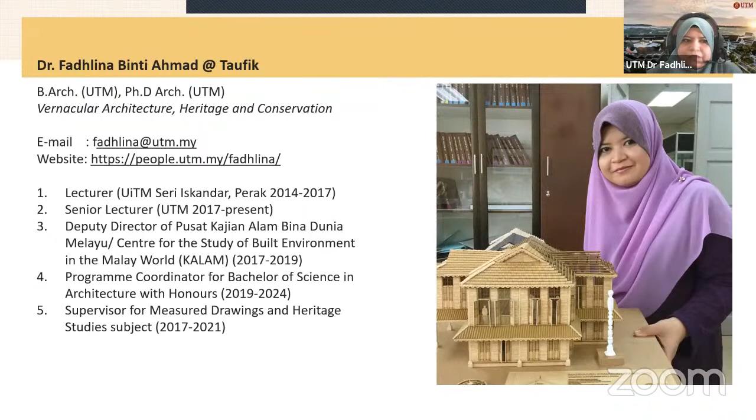I have been supervising measured drawing in UTM since 2017 until now, but unfortunately for these 2 years we cannot get permission to go to the site, so we changed the measured drawing into the monograph publication instead of going to site. So what I'm going to share here is more on how to do the data gathering on site and how to do the report writing, but it will be only a brief and general overview.

Okay, so first thing first, I think you are going to do your measured drawing this semester, right? Or this week, is it, Madam Farhana? The students are going to the site. Yeah, actually one of the groups is already at site today, they're not joining the talk, they will watch the YouTube later. Okay, so it depends on the group. Right, so basically this one is more on the things that you are going to do on your site later.

Okay, why do we need to learn about the history? I'll start with the introduction first. To understand the present and anticipate the future, one must know enough of the past, enough to have a sense of history of people. Also, a quote by Robert Penn Warren: history cannot give us a program for the future, but it can give a fuller understanding of ourselves and our common humanity so that we can better face the future.

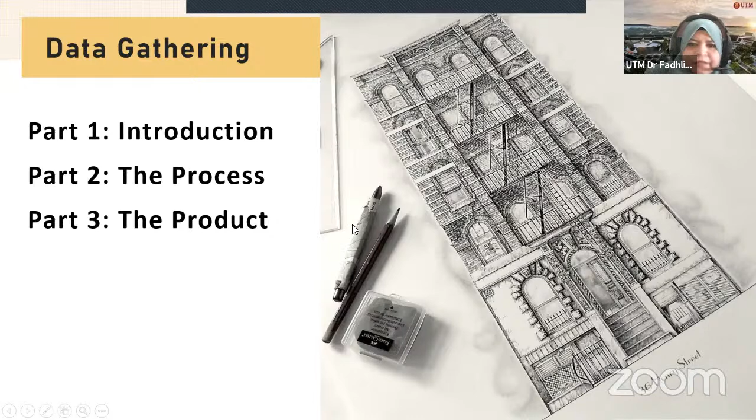Okay, what is measured drawing? This is another question for the students. Can I pick names? Okay, so next is Rafika. Okay, what do you know about measured drawing?

You are going to do the measured drawing this week, right? So perhaps by today you are already familiar with this term. Rafika, you there? I should take students' attendance now. Hi, Rafika. Hello, madam. Huh, yes, what is

Hello? Are you talking to us? Yeah, Dr. Fadhlina. Okay, Muhammad. Oh, Muhammad, hi. Thank you for joining us today. I'm not feeling well, that's why I'm not chasing all my work. It's okay, my pleasure to share the experience with you guys. So I will be joining you today, just keep me up, I just listen to what you say. It's okay, nice to meet you Muhammad. Thank you. Okay.

So Rafika, are you there? Hello? Right, okay, yes yes. Are you talking? Can you hear me clearly? Tak dengar lah Rafika, mic you tak bergerak pun tu. Oh sorry, sekejap. Apalah, I think mic problem kot. Okay apa tadi, okay. Zainab, hi Zainab.

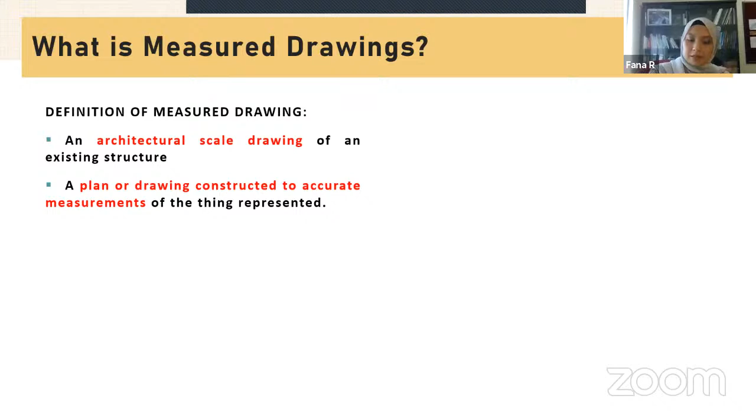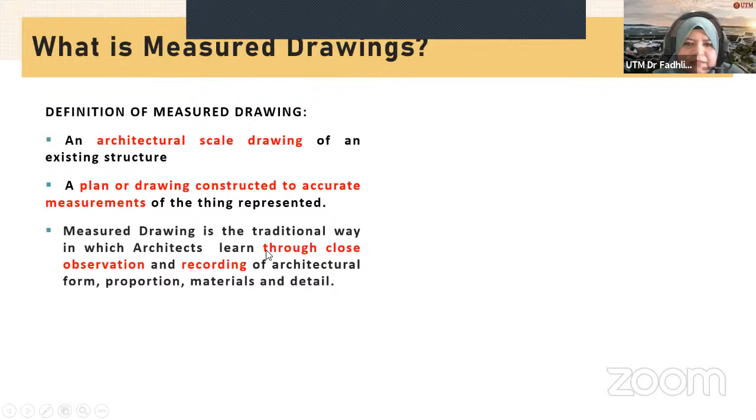Right, definition of measured drawing: an architectural scale drawing of an existing structure, meaning the structure is already there, and then you go there and measure it and put it into your documentation. It can be a plan or drawing constructed to accurate measurement of the things represented, like you said. It is a traditional way in which architects learn through close observation and recording of architectural form, proportion, materials, and details. So those are the things you need to know about measuring drawings of buildings after this.

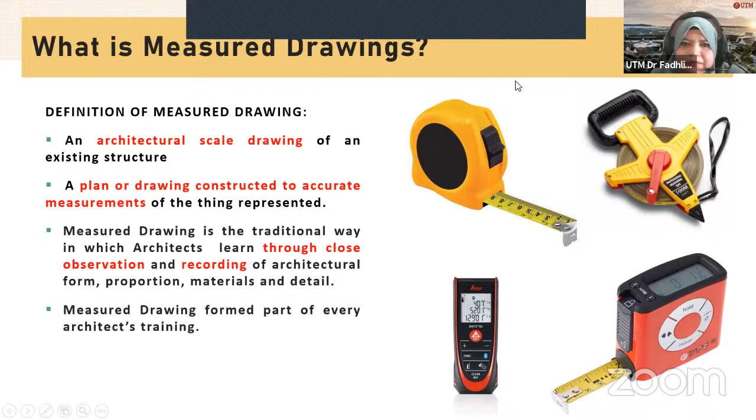You need to record all these findings in terms of architectural form, proportion, materials, and details, and so on, and it goes beyond just this one. Okay, these are the traditional equipment used for measured drawing nowadays. Because nowadays we also have technology, something like GIS and so on, but this one we usually use for students to learn in more detail and in an easier way.

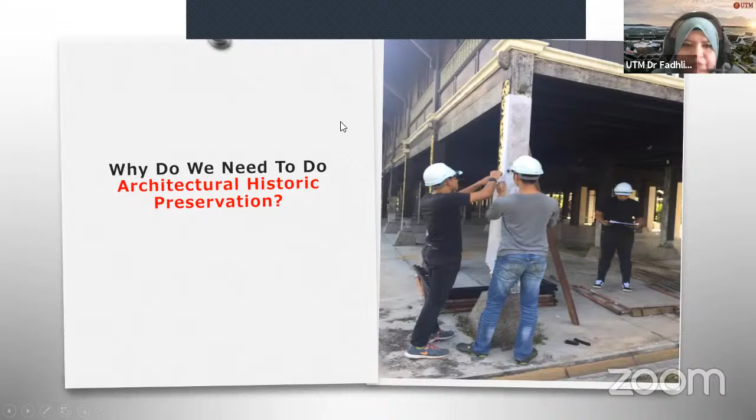Why do we need to do architectural historic preservation? The first one is for education purposes, for the 3D learning experience. For instance, you have this kind of historical building that nobody has documented before, and then you go there and do all this kind of measurement, something like this one. They are trying to rub the pattern so that they can document this pattern into a 3D model. This one is also like your studio project, but in your studio project you design your own building and then do the 3D model, whereas this one is basically based on whatever already exists.

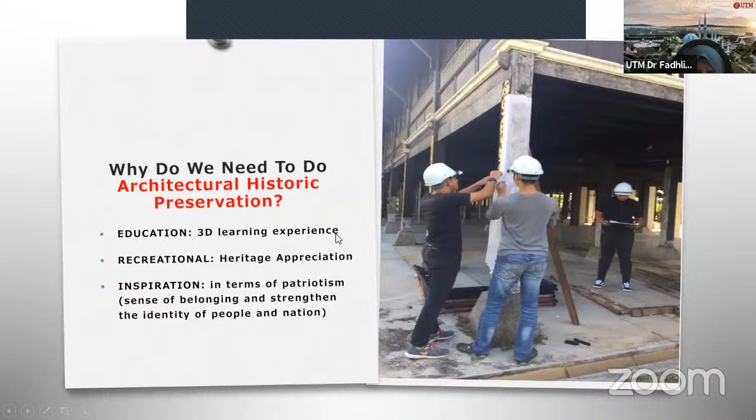And then for the recreational purpose, it is more about heritage appreciation. Like I said before, why do we need to learn about heritage and traditional things, so that we can appreciate them more. Then there's inspiration in terms of patriotism, sense of belonging, and strengthening the identity of people and nation. Not only from Malaysia - some of you are coming from different countries, right? So you also have your own identity based on your own origin, and you need to know the identity of your particular space and nation.

Measured drawing is always related to values, including several values included in measured drawing. For instance, we have architectural values that we want to instill in you students. Architectural values, heritage values, you need to know about cultural values, social values, aesthetic values, historical values, and the values of sense of place. So we are not only focusing on architectural values, but you need to know all of these things in general, all right?

Okay, issues that are commonly faced by historical buildings. That's why we need to do all this measured drawing and so on.

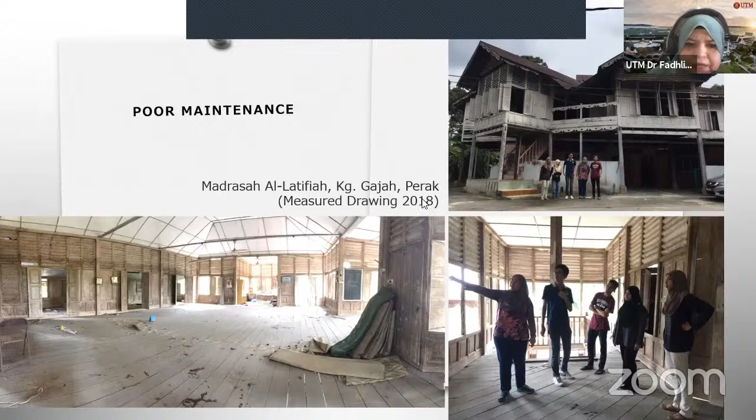This one is a madrasah. They use it as a learning center to recite Al-Quran, and they usually invite religious preachers to come and stay here so that villagers can come and learn about the Islamic religion and so on.

This is the condition during 2018, on the upper part of this building. But until now, they are still using the lower part as a kindergarten. I just want to show how things will ruin everything if there is poor maintenance, because of conflicts in terms of financial constraints and so on.

And some of the buildings have been demolished because they wanted to do... sorry, can you hear the sound?

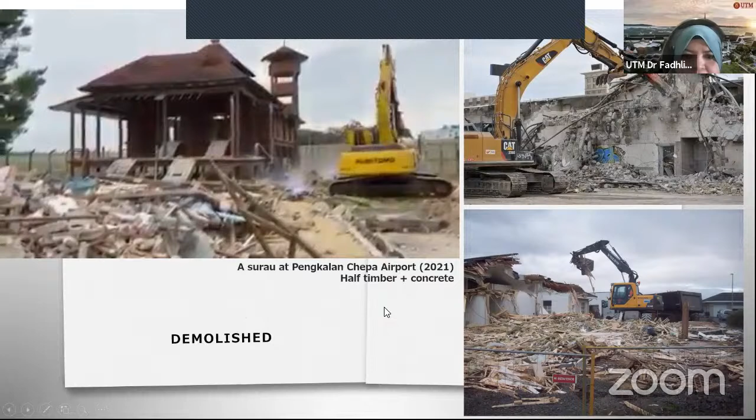Okay, this is an example of a surau at Pengkalan Chepa Airport. I think Madam Farhana knows about this building because it has been used for years. But in 2021, a few months ago, it was demolished because they wanted to make the land bigger for Pengkalan Chepa Airport. Some of the nearby residents did not agree with this demolition because it has been one of their childhood memories, using this surau for daily prayers.

So that's how things became very unfortunate. We could not save the heritage building. But there is something contradicting in how they handled it. For instance, half of the timber had been disassembled, and the tractor was only used to demolish the concrete part of the surau.

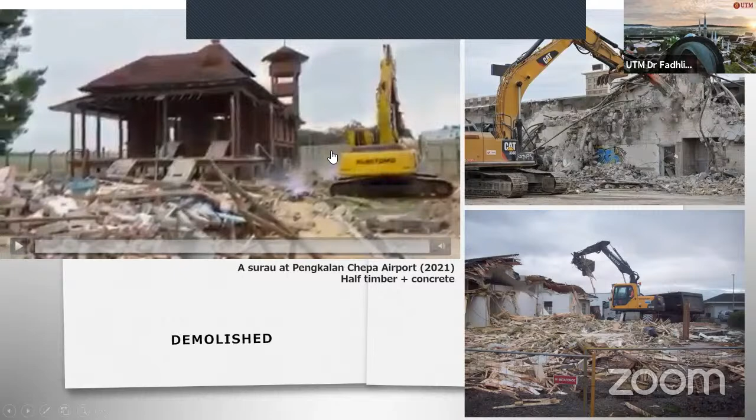Alright, so that was only the introduction. Why do we need to do measured drawing? It's so that before heritage buildings and traditional buildings vanish, we have already done the documentation.

This one is more on the process. As I said, I will share about my experience in UTM, because I have been involved in UTM's measured drawing program since 2017. We currently have more than 600 buildings documented, saved in Kalam, Pusat Kajian Alam Bina Dunia Melayu. All the documents and compilations of the measured drawings are saved there, comprising mosques, shop houses, temples, churches, schools, government quarters, administration offices, palaces, and so on.

We have also done measured drawing throughout Malaysia, and we managed to do it in South Thailand, North Sulawesi, South Sulawesi, and Cambodia.

In UTM, we have two separate subjects for measured drawing: one covering the drawings and posters, and another called Heritage Studies, comprising 3 credits, which involves report writing. We teach this subject during the short semester, so students do not have any other subject except measured drawing and heritage studies, allowing them to focus more on it.

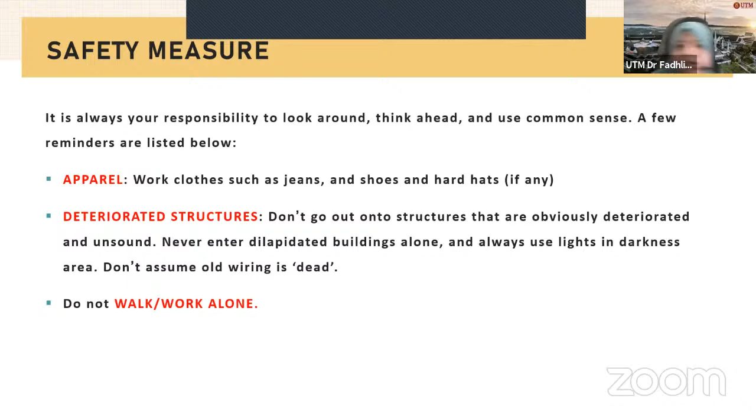And on site, these are the steps, perhaps tips and tricks you can use in doing your measured drawing later, for your first-hand experience. Get to know your building first before you start measuring. You need to know the location, surrounding context, current condition, and so on. For instance, where is the location of the building? For the first one, it's a Kelantan traditional Chinese house located near the beach, and what design strategies did they use to make sure it's suitable to be next to the beach. Before you go to site, you can also try to find this information online.

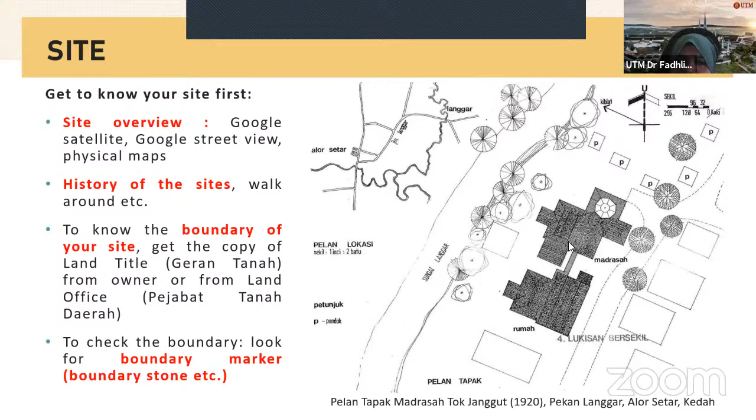Right, so these are usually what we require you to know - the history of the site, and the geography of the site. Geography means you need to know the type of topography of the particular site - for instance, is it located on a hill, or next to a river, or next to a beach?

And then the socio-economy - what do they do in their daily life? What are the main resources for them? Are they fishing? Are they doing rice cultivation? Are they rubber tappers? You need to know the common trait of all the people living nearby, and also the culture of that particular community, and their settlement.

For the measured drawing, you are very dependent on primary and secondary sources. For primary sources, you get it from field studies based on interviews with the house owners, neighbors, relatives, headman, historian, craftsman, woodcarvers, tukang, local authority, and so on. Make sure when you do your measured drawing later, you interview all these related people to know more about your building. If not, you will lack data if you don't do this interview session.

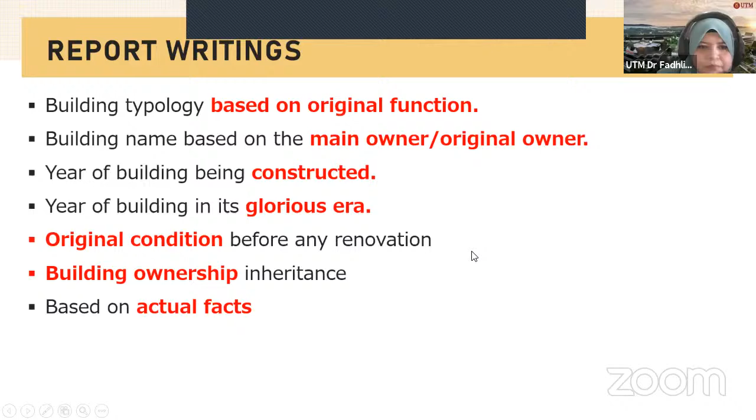And we need to know the original condition before any renovation, and also the building ownership inheritance. We usually do a family tree of the owners, for instance who is the grandfather and who is the great grandfather. Perhaps we can get it from the newer generation of this house, and it needs to be based on actual fact.

There will be some challenges for abandoned buildings. I'm not sure whether you are going to do an abandoned building or a newer building. Before this, we also worked on abandoned buildings—some had a change of name or function, like I said before, and some were in dreadful, very bad condition. Sometimes we cannot even step into the building, so we need to find relatives for information. This is quite hard because the relatives have usually already migrated to urban areas, so some information cannot be obtained directly from the surroundings.

There is also conflict of facts. For instance, somebody tells you the house was constructed in 1920, but somebody else says it was built in 1930—so there is a conflict of facts. But your responsibility is only reporting. You need to state in your report that the headman of the village said the house was constructed in 1920, however the relatives say it was built in 1930. You need to report both; you cannot assume one is right, but you need to report both and mention who said what.

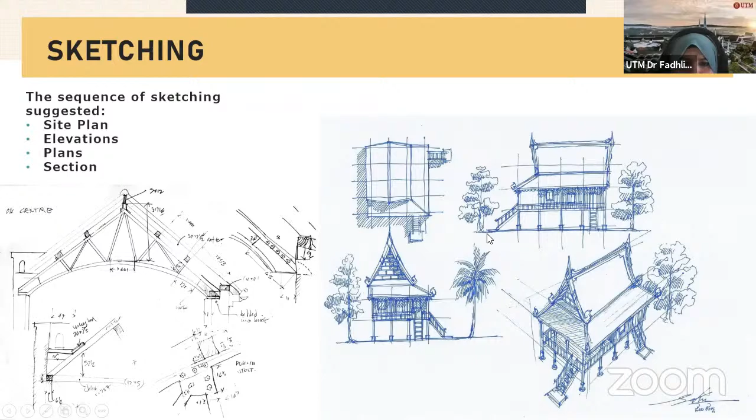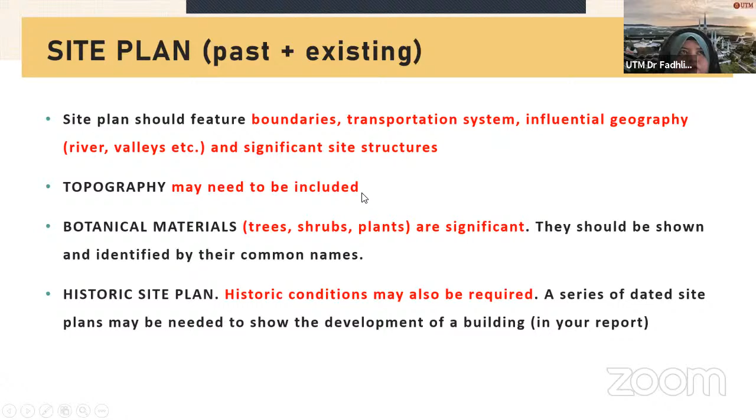This is the first thing when you reach your site later - you need to sketch. And I think this has been mentioned before: you need to know your boundaries, topography, whether there are trees, shrubs, plants. And if the site is located in a historical area, you need to know the development of the building and so on, perhaps the morphology of the buildings surrounding this site.

This is another example of how to do the floor plan. We usually start with the outline first, working outside the building, then add openings like windows, doors, external, etc. Then we start on the inside of the building, beginning with rooms, etc. You need to show the thickness of the wall because you're doing measured drawing. Everything must be measured - we need to know the accurate measurement or dimension for each space.

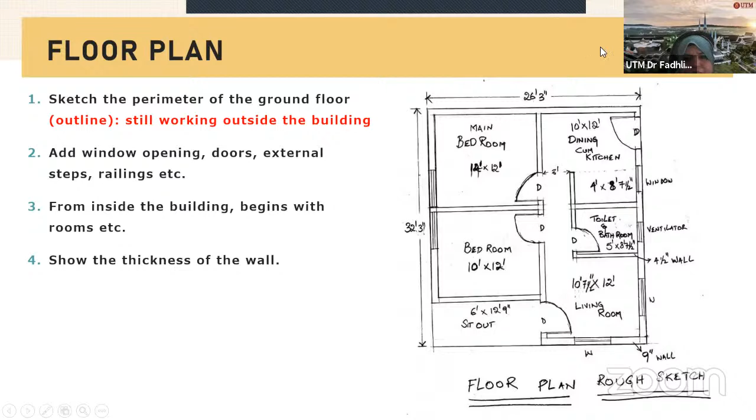And this one is the elevation - principal facade of the structure, sketch the elevation from a distance. When you reach your measured drawing of buildings, you take some distance and start to draw the elevation. The first lines to go on paper should be the eaves lines, which are horizontal, then you do the vertical walls and mark the ground line, adding details such as doors, windows, rainwater pipes, etc. You can also try to imagine the scale and proportion of each element.

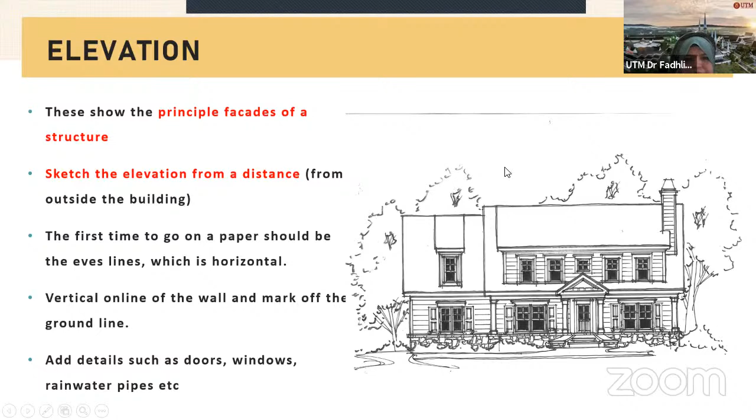For instance, how big is the two-leaf door? How big is the one-leaf door? It's different from each other, right? So try to exercise more on this scale and proportion in your sketches. Okay, and then this one is for the section.

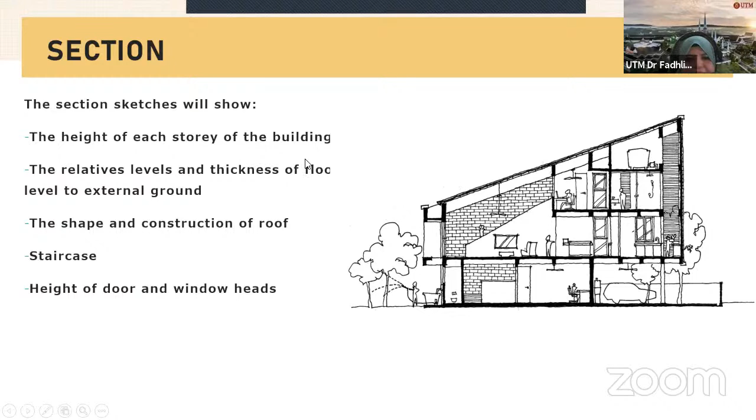You can also try to sketch your section, the height of each story building, relative level, the shape and construction of the roofs. Try to draw the staircase, height of door and window heads, etc. And try to do the roof plan.

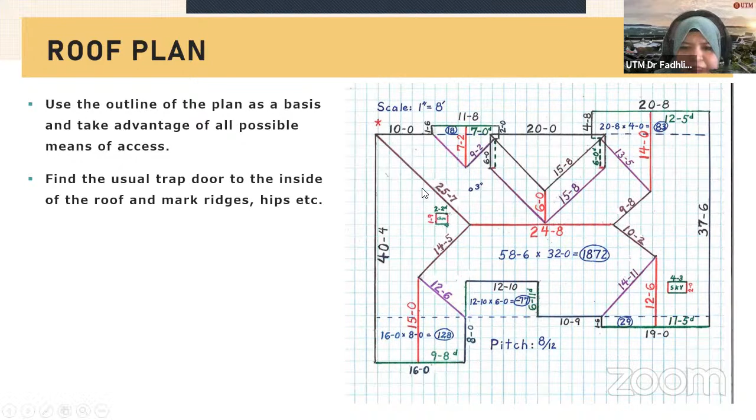Usually some of the students started using the roof plan from Google satellite, and then they get this roof plan. Perhaps this is one of the advantages of this new technology using Google satellite. Or you can also use drones. I think UTM has drones that can be rented to students, so you can use drones to indicate the roof plan.

This one is also on the measurement. Sometimes we also use help from the bomba, who give us permission to use the ladder truck to get to the top of the building.

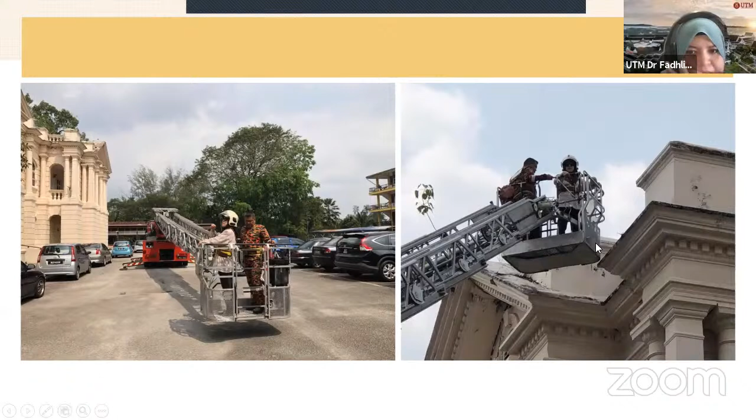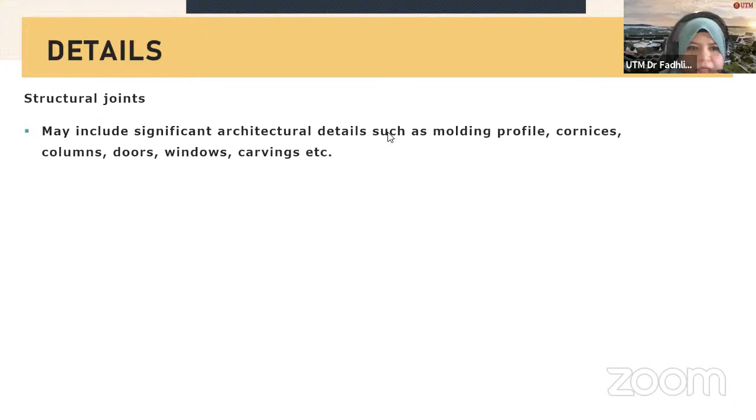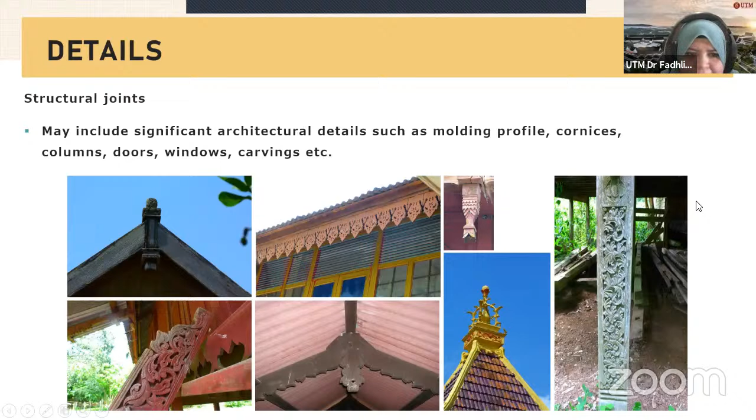On the detailings, it may include significant architectural details such as molding, profile, cornice, columns, doors, windows, carvings, etc. This is something you need to really go into detail on, because these small details are very beautiful and you need to appreciate them more.

I know you already know how to do this, because usually you use AutoCAD and Revit for your studio project, right? So it is the same thing. You can just trace it back in AutoCAD later.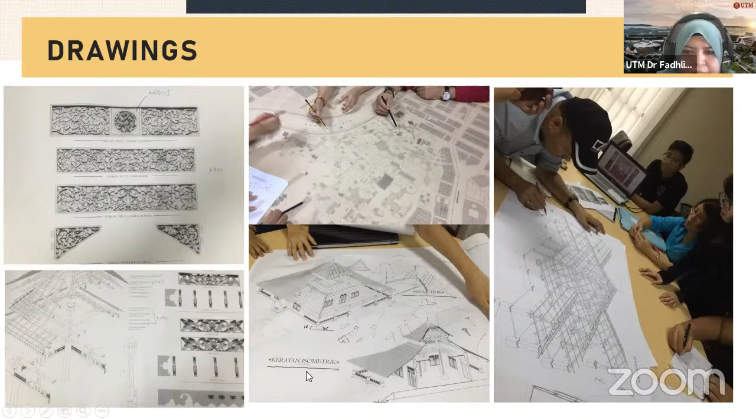So, preparing for submission. After they came back to UTM, we started to check back whatever they did for their drawings and so on. As I said before, they do the rubbings and then turn them into AutoCAD drawings. These are examples of the drawings that they have contributed.

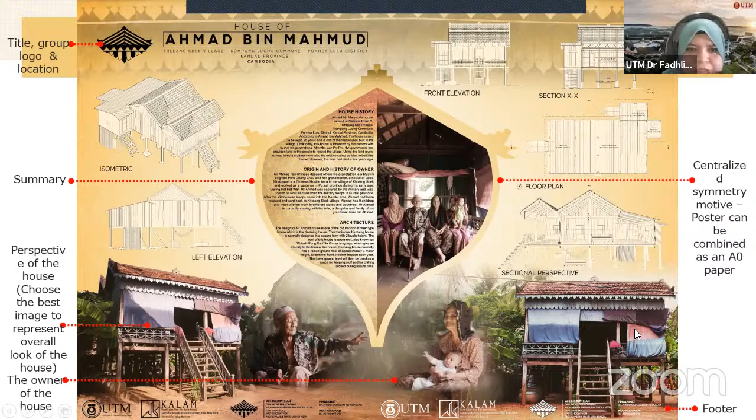This is another example, which we did in Cambodia.

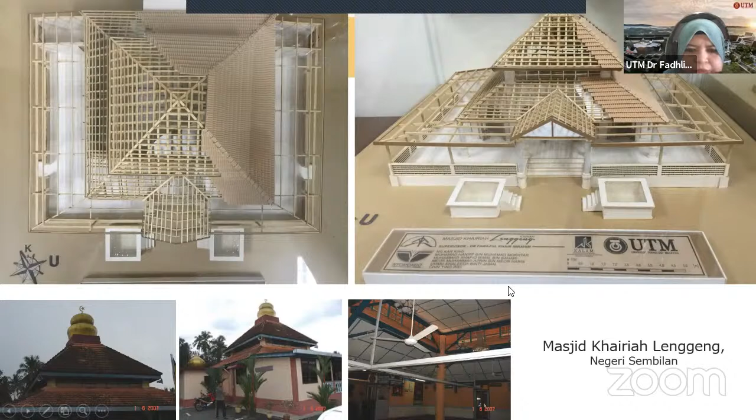This is another example of a model submission: Masjid Khairiah Lenggeng, Negeri Sembilan, from the actual building, so we did the model. This one is Rumah Kedai Wakaf Toh Puan Saripah.

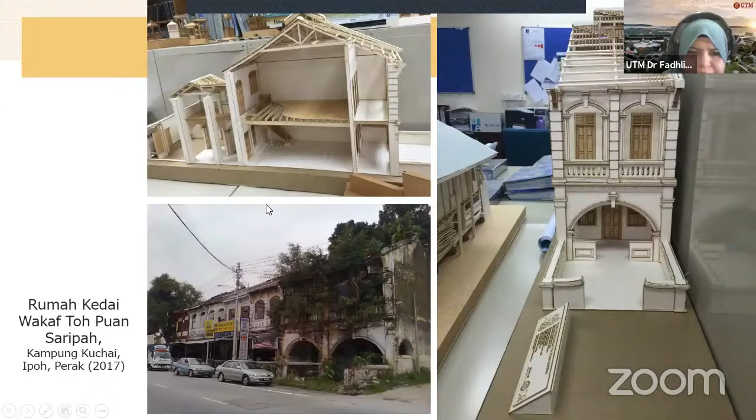If you can see, it is an abandoned building with a lot of trees covering this area. But this Kampung Kuchai area is very historical, and now it is already abandoned because it is situated in an urban area in Ipoh.

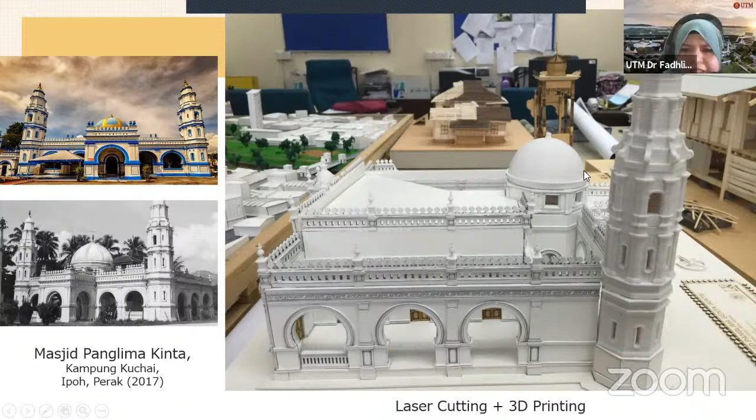This one is Masjid Panglima Kinta. We did the model using 3D printing and laser cutting. For this menara, because they are using 3D printing, it is quite costly. The menara itself has cost them about 250.

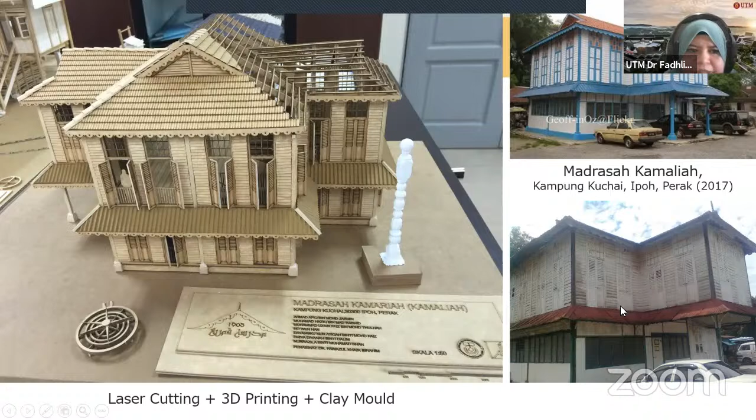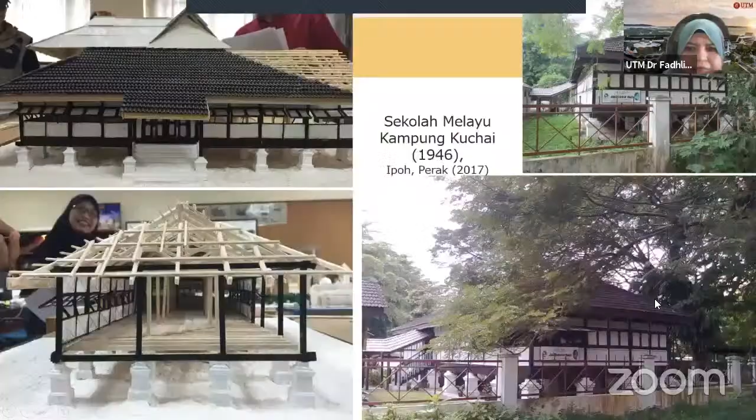Okay, and then a small detail they use laser cutting. This one is another example, the one that we did the discussion with the villages before this, Madrasah Kamaliah. And then this one is Sekolah Melayu Kampung Kuchai, Ipoh, also in 2017. I think that's all.

So you will need to know your roles and responsibilities now. It is not just a simple assignment for you guys. You will be a major contributor to the documentation of Malaysian architectural heritage. So it is a very big role, and you need to take the responsibility very eagerly.